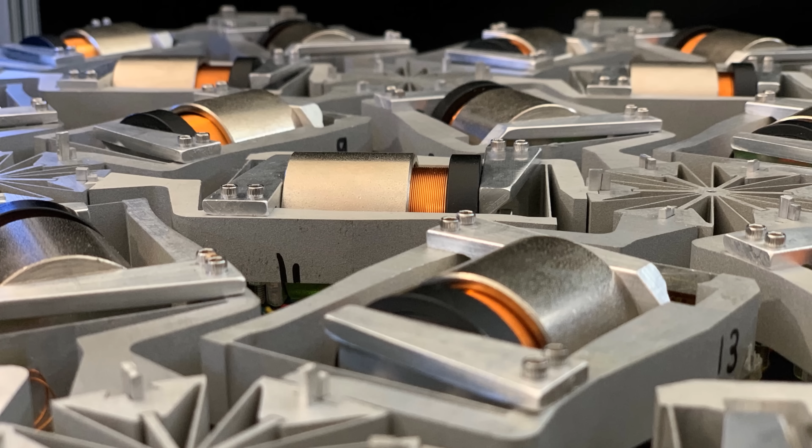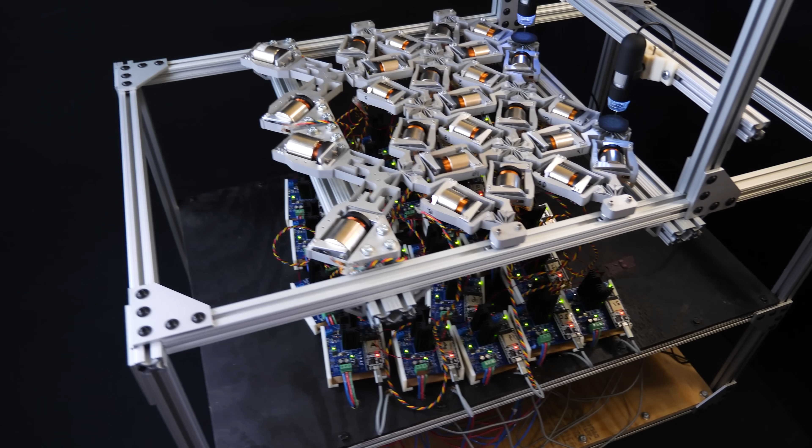This is a compliant machine called a mechanical neural network. It's the first of its kind to successfully demonstrate the mysterious ability to learn, similar to biological brains. Inspired by the mathematics of artificial neural networks, which enable most artificial intelligent machine learning technologies today, this mechanical neural network paves the way for a new kind of material that can physically learn its mechanical behaviors and properties.

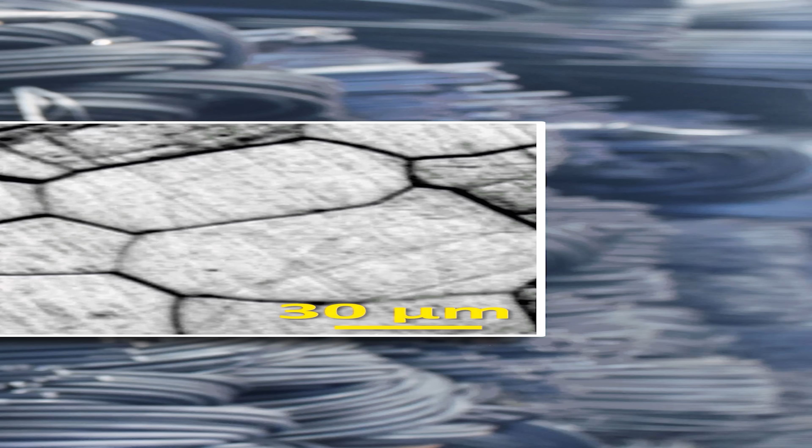Whereas the properties of most materials remain largely fixed and are a function of their composition and microstructure, this new kind of learning material could get better and better at exhibiting desired mechanical properties and behaviors, such as this shape morphing behavior, when exposed to ever-increasing amounts of loading experiences.

And if such materials are ever damaged or cut to form new shapes or sizes, they could not only relearn their original behaviors, but they could also learn new behaviors as desired. The applications of such learning materials are endless.

Imagine training the wings of an aircraft so that they learn to optimally warp their airfoil shape when subjected to unanticipated and changing wind loading conditions, so that the aircraft improves its fuel efficiency and maneuverability with every flight.

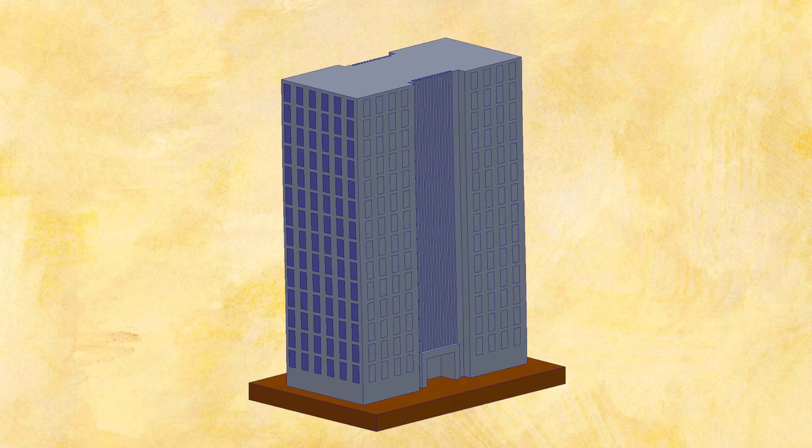Or imagine training the structural members of a building by shaking them in different ways so that the building learns to remain stationary regardless of the kind of seismic waves induced by an actual earthquake when it strikes.

Or imagine training body armor by repeatedly shooting it at different locations and from different orientations so that the armor gets better and better at redirecting any projectiles' impacting shock waves away from vital organs.

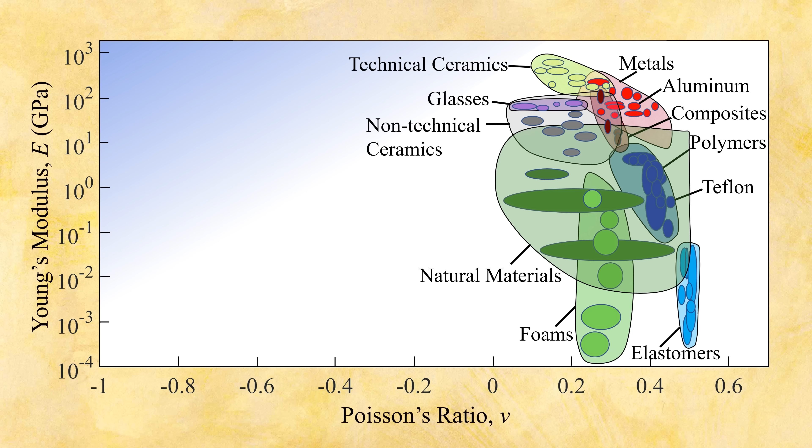Instead of expending the immense amount of time and cost it currently takes to develop a new material that achieves specific combinations of desired properties which are currently not possible, such learning materials could simply be deployed without human understanding, and the material would autonomously learn to achieve those properties while also acquiring that understanding for future designers to learn from. So how would this kind of learning material work?

Well, it's important to first understand the source of its inspiration. The idea for a mechanical neural network was inspired by a physical version of an artificial neural network.

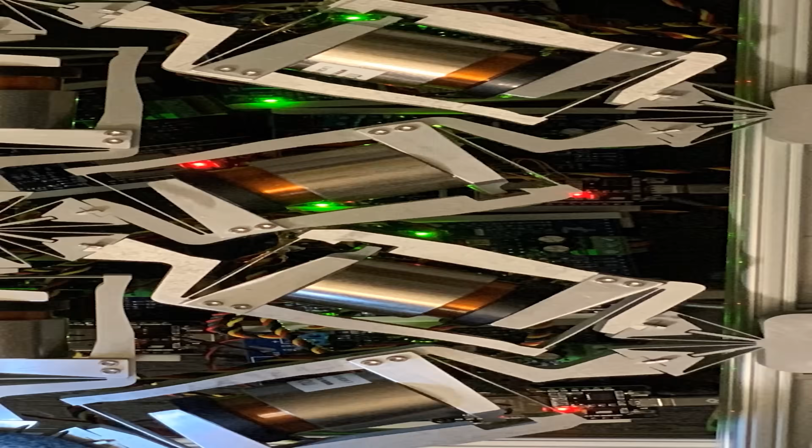The mathematics underlying artificial neural networks are diagrammed using interconnected lines that represent scalar weight values, which are multiplied by input numbers that are fed into multiple layers of neurons. These neurons consist of activation functions that ultimately produce output numbers.

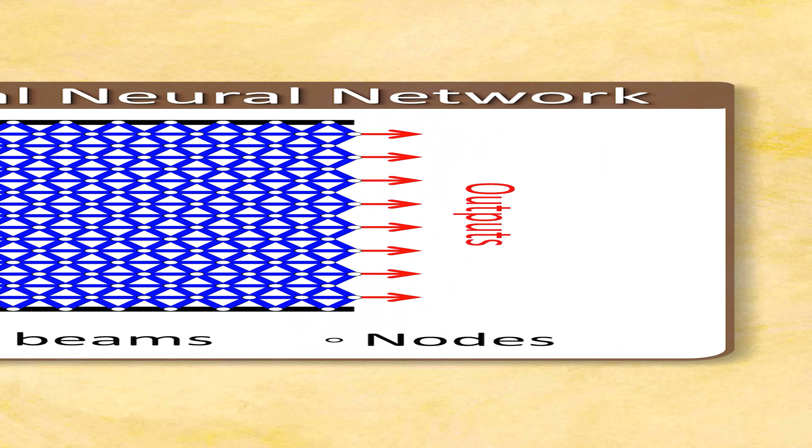To demonstrate how the envisioned mechanical learning would work, suppose a shape morphing behavior is desired for the following 8-layer deep triangular lattice consisting of 8 input nodes and 8 output nodes. Note that the black bars along the top and bottom edges of this lattice represent a grounded body on which the nodes that touch it are pinned.

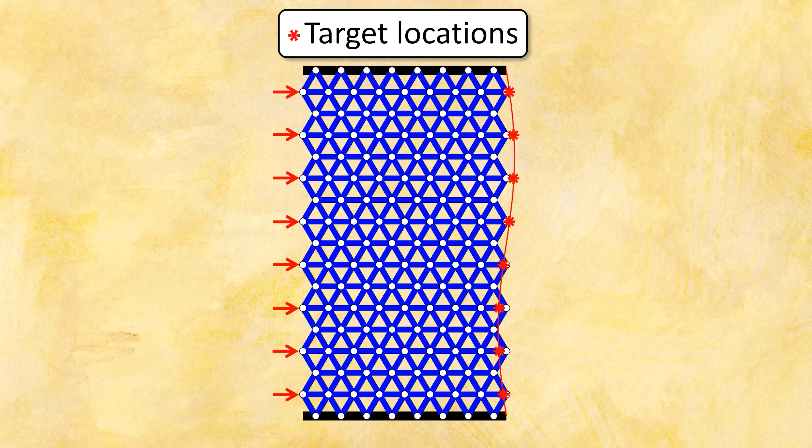Suppose that when the input nodes along the left side are loaded by equivalent horizontal forces, it is desired that the output nodes along the right side respond by displacing to target locations along the contour of an undulating sinusoidal shape shown as the red curve.

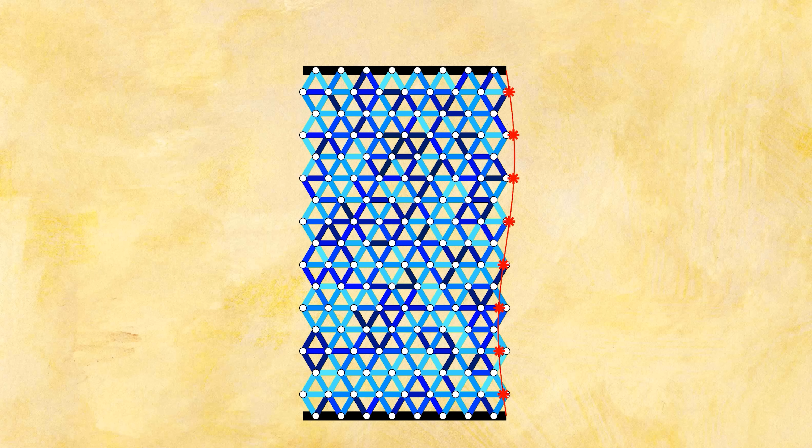To learn this shape morphing behavior, each tunable beam in the lattice would start the learning process by setting their axial stiffness to a random value, depicted here as a specific shade of blue, according to this color scale.

When the input nodes on the left side of the lattice are loaded with the horizontal input forces of the desired behavior, the resulting displacements of the output nodes would then be measured, and a mean squared error, i.e.

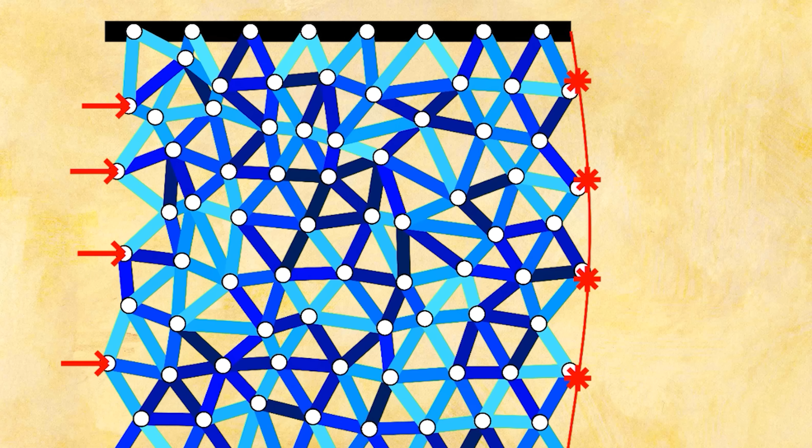MSE would be calculated by finding the average of the scalar difference between the target output node displacements and these measured output node displacements, i.e. their final location error, E_i, for all n nodes on the right side of the lattice, squared. For this lattice, n equals 8 output nodes.

The tunable beam elements would then change their axial stiffness values according to an optimization algorithm, such that when the process of loading, measuring, and calculating the mean squared error is repeated, the mean squared error would be minimized.

Until a working combination of beam stiffness values is identified that achieves the desired behavior. One possible combination of beam stiffness values that enabled this mechanical neural network to achieve the desired sinusoidal shape morphing behavior is shown here. Suppose it is desired that the neural network then learns another new behavior in addition to the first: that in addition to the lattice's output nodes displacing to this sinusoidal shape in response to its input nodes being loaded with equivalent horizontal forces, the same lattice's output nodes also displace to an inverted sinusoidal shape in response to its input nodes being loaded by equivalent vertical input forces instead.

To learn the new behavior, shown green, while maintaining the ability to simultaneously achieve the first behavior, shown red, the lattice of tunable beam elements could either start with another random combination of stiffness values, as shown here, or they could start with the same combination of stiffness values that were found to successfully achieve the first behavior only. Parenthetically, the latter choice becomes increasingly favorable as the mechanical neural network acquires more and more behaviors, because the working combination of beam stiffness values acts as a sort of muscle memory for previously learned behaviors.

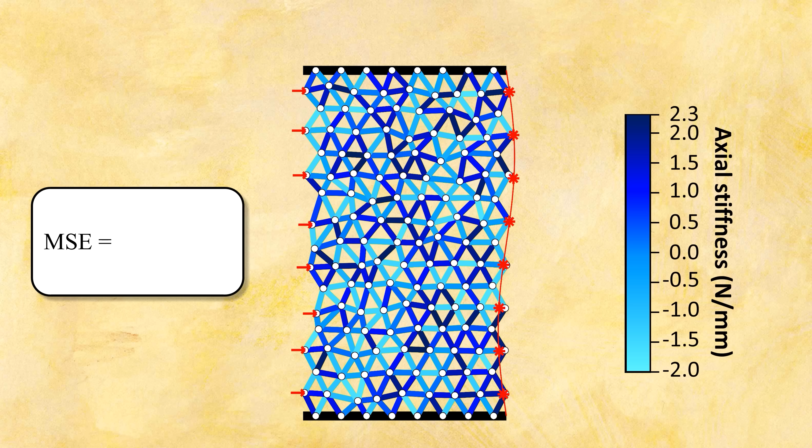The tunable beam elements would then change their axial stiffness values according to the same optimization algorithm, such that when the process of loading, measuring, and calculating the cumulative mean squared error of both behaviors is repeated, this new mean squared error would be minimized until a working combination of beam stiffness values is identified that successfully achieves the first and second behaviors simultaneously.

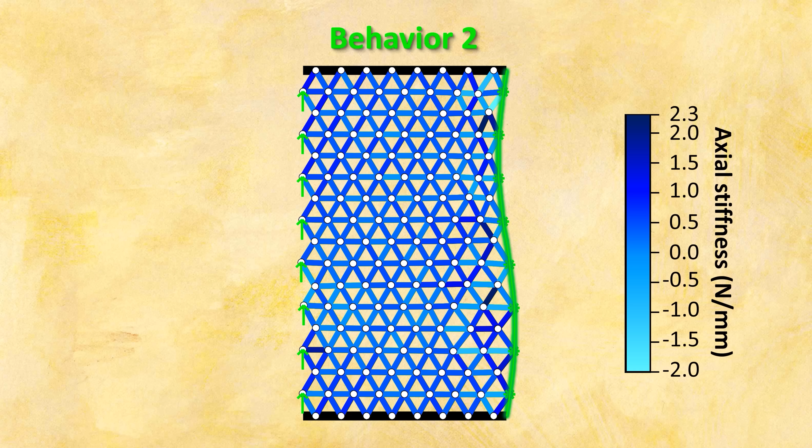Note that the tunable beams all remain the same shade of blue regardless of whether the lattice is actuated with the loads of the first or the second behaviors, because the same combination of beam stiffness values successfully achieves both behaviors. It's also important to recognize that mechanical neural networks can achieve the same desired set of behaviors using many different combinations of beam stiffness values.

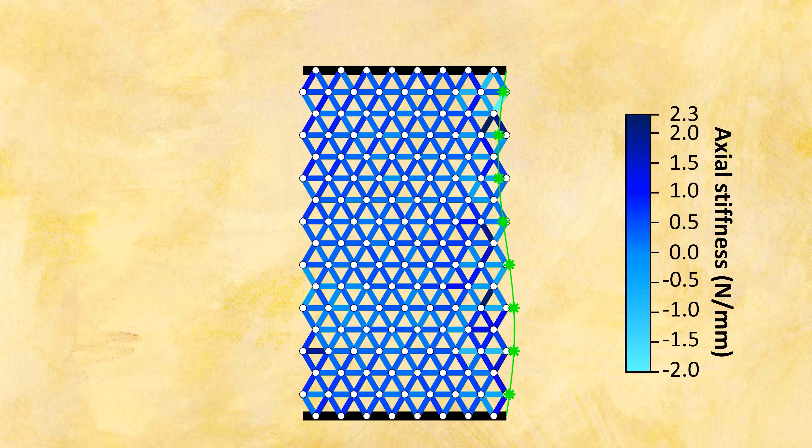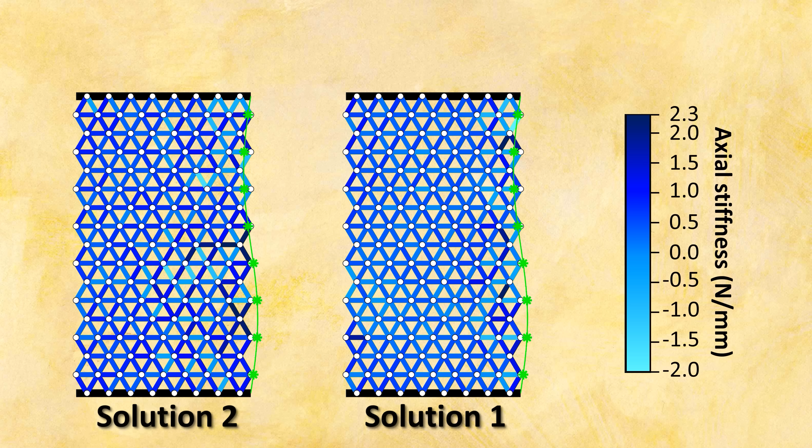Note, for instance, that although this second solution exhibits the same desired behaviors as our first solution, it does so with an entirely different combination of beam stiffness values. The fact that many different combinations of beam stiffness values can achieve the same behaviors allows mechanical neural networks to learn more and more new behaviors while retaining memory of previously learned behaviors.

Finally, it's also worth noting that mechanical neural networks are not limited to learning shape-morphing behaviors only, but can learn almost any combination of quasi-static, thermal, and even dynamic mechanical behaviors, including the control of wave propagation within their lattice.

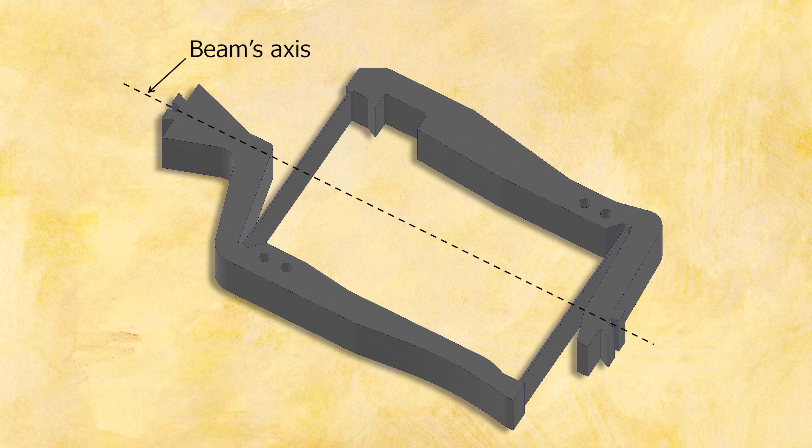To experimentally demonstrate the concept of a mechanical neural network, it was important to first design a tunable beam that could achieve adjustable stiffness along its axis. After comparing multiple concepts, we settled on this compliant design. It consists of two parallel blade flexures that deform to guide the translational extension and contraction of the beam along its axis, while rigidly constraining all other directions.

A bracket is attached to the beam's housing, in part to provide a hard stop so that the parallel blade flexures are not allowed to deform to a point where they would yield, i.e. be permanently damaged beyond their elastic limit.

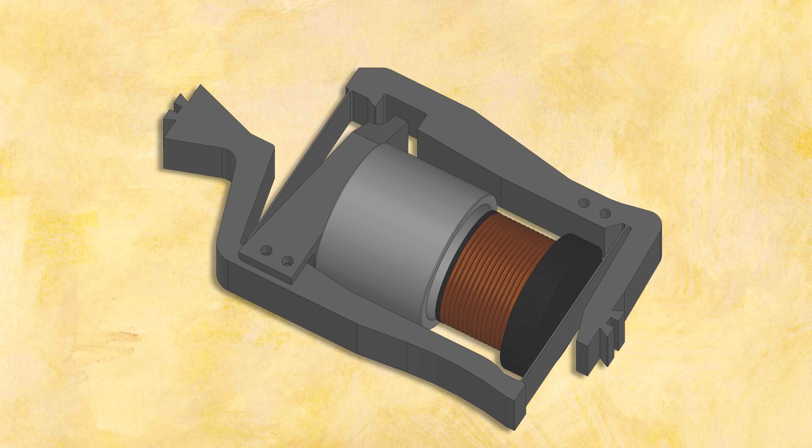The bracket is also attached to the magnet end of a voice coil actuator, which is aligned with the beam's central axis. The actuator's other mating end, which consists of a coil of copper wire wrapped around a drum, is attached to another bracket that is attached to the other side of the beam's housing.

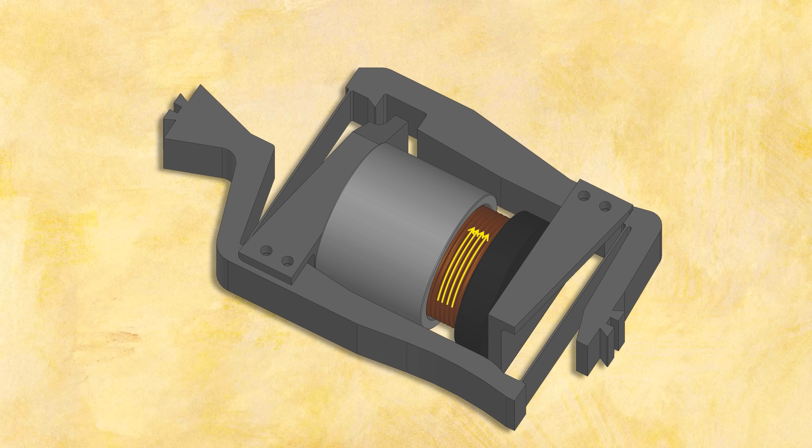Depending on the direction and magnitude of the current flowing through the wrapped wire, a magnetic field can be induced by the coil that pushes or pulls on the voice coil's magnet end, thus actuating the beam along its axis in either direction. Two strain gauge sensors are mounted on either side of one of the parallel blade flexures at its base to accurately measure the resulting displacement of the beam along its axis by transforming the flexure's deformation strain into a proportional voltage signal.

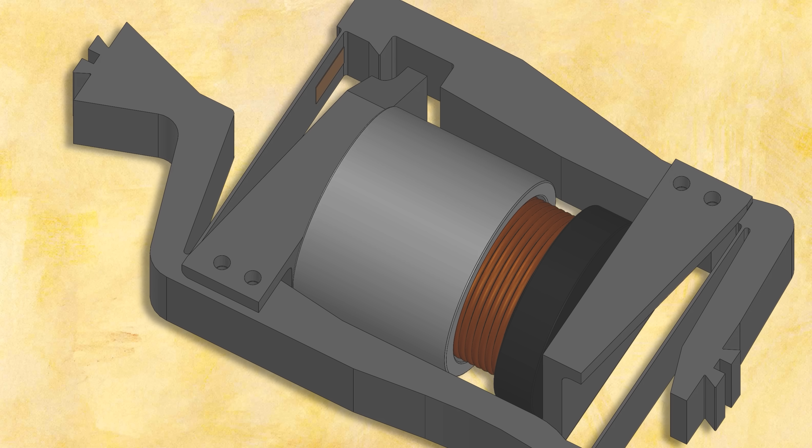In this way, closed-loop control can be applied to actively tune the beam's axial stiffness to achieve any value between an upper and a lower limit.

You could imagine that the highest axial stiffness would be achieved if, when the beam is loaded, the voice coil responds by resisting the load with the largest actuated force possible in the opposite direction as the applied load. Likewise, the lowest axial stiffness would be achieved if, when the beam is loaded, the voice coil responds by assisting the load with the largest actuated force possible along the same direction as the applied load.

In this way, the tunable beams could be made to achieve zero or even negative stiffness.

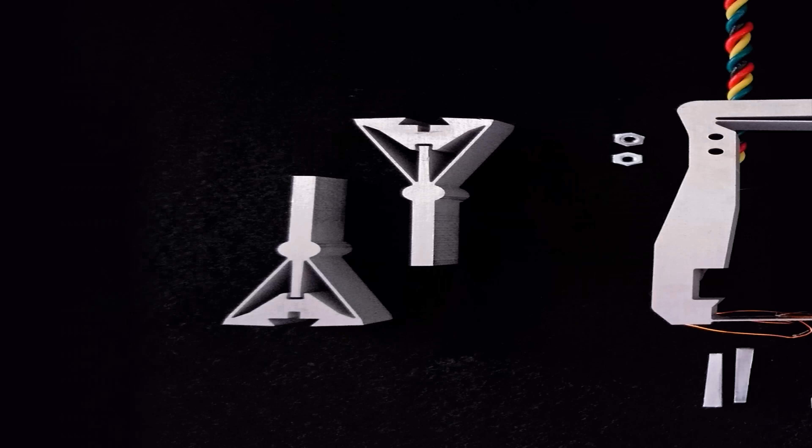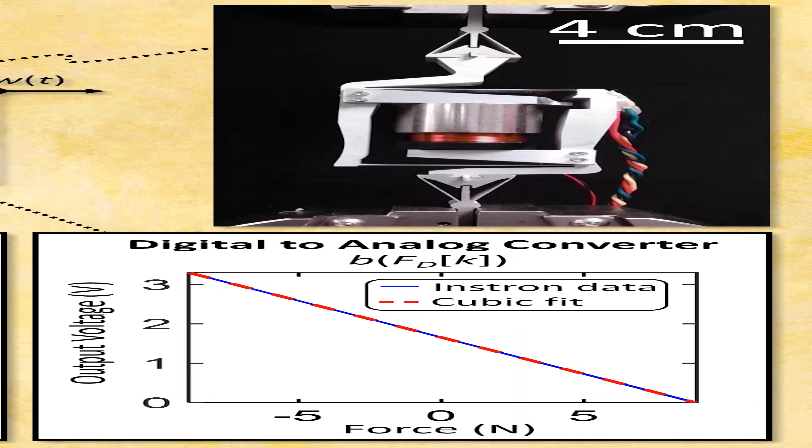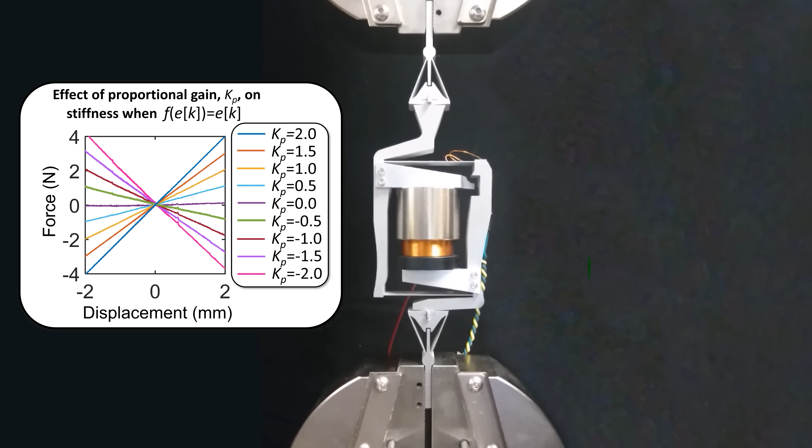This plot, measured using an Instron testing machine, shows the linear force displacement responses of a tunable beam being controlled with different Kp values to achieve corresponding positive and negative axial stiffness values. The maximum and minimum stiffness values that the beam could be controlled to achieve without becoming unstable was measured to be 2.3 newtons per millimeter and -2 newtons per millimeter respectively.

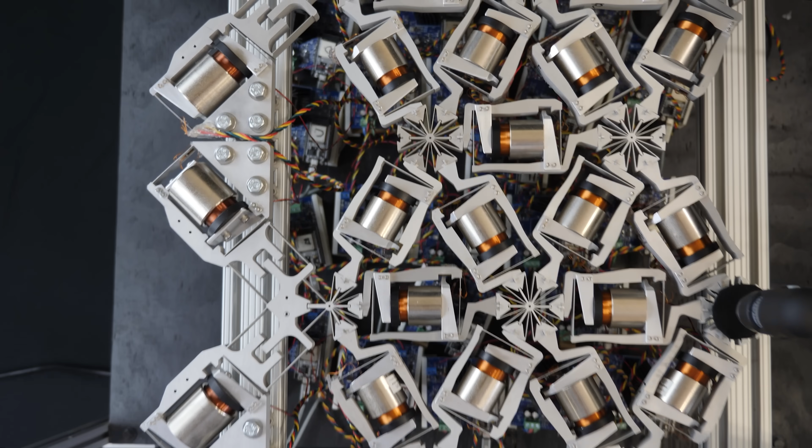Four additional voice coil actuators were used in conjunction with decoupling flexures to drive the two input nodes on the left side of the lattice with forces that can be made to point in any in-plane direction desired. Two cameras mounted on a frame directly measure the displacement of pins inserted at the center of both output nodes, and black felt is used to contrast the white color of the pin heads so that they stand out.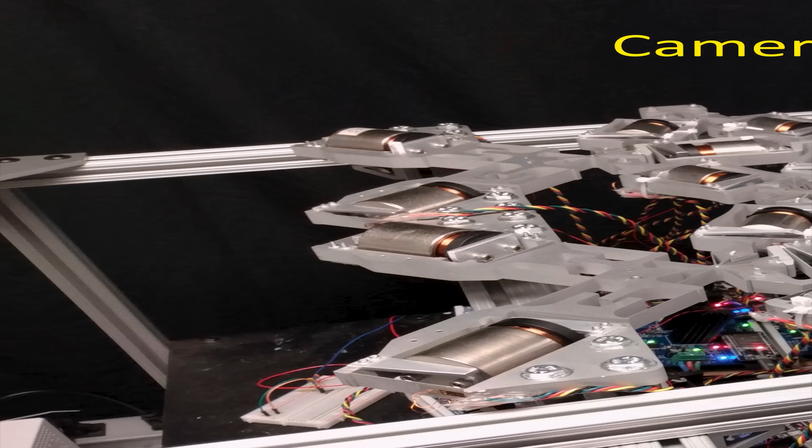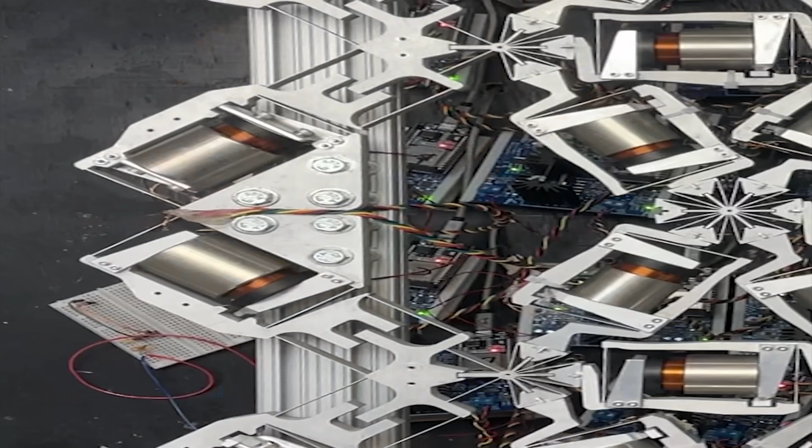Although the machine's two mounted cameras can directly measure the lattice's output node displacements, note that the strain gauge sensors on each beam can directly measure the beam's extension and contraction, and that information can be used to indirectly calculate the displacements of all the nodes in the mechanical neural network, including the displacements of its output nodes. This strain gauge approach to indirectly sensing the output node displacements can predict the displacements with a much higher sampling rate compared to the frame rate of the cameras.

These plots show how accurately the strain gauge approach tracked the camera's measured output node displacements when the lattice was loaded with a random combination of axial stiffness values uploaded to each tunable beam in the lattice. The strain gauge approach is also important to the functionality of mechanical neural networks because without the approach, such networks cannot learn without being placed in a testing rig, which is not practical for most applications that require in-field learning.

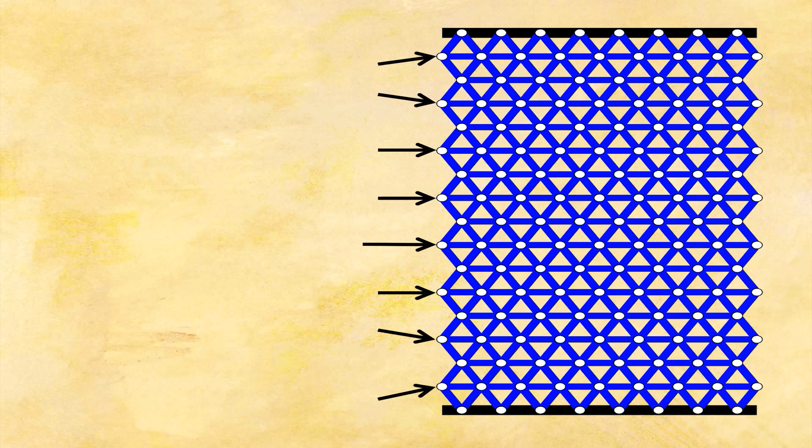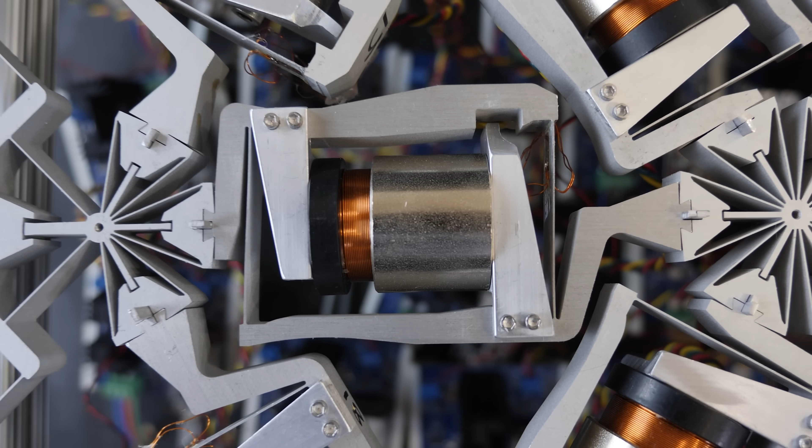Moreover, the ability to accurately measure the displacements of all the nodes in the network when it is subjected to unanticipated and changing ambient loading scenarios is necessary for mechanical neural networks to identify when those loads correspond to the input forces of their desired behaviors being learned, so the network can calculate its mean squared error and minimize it as described previously. Note that the input node forces can be indirectly calculated at any given time using the current combination of beam stiffness values uploaded to the network and the corresponding strain gauge measured displacements of all the network's nodes that resulted from these loading forces.

The first optimization algorithm we used to determine what combination of axial stiffness values should be uploaded to each tunable beam in the lattice during each step of the learning approach was a genetic algorithm.

The algorithm samples 1,000 random beam stiffness combinations. It then identifies and plots the combination that achieved the lowest resulting output node displacement mean squared error. A new, more promising group of 1,000 beam stiffness combinations is then generated by crossing the most successful combinations attempted in the previous group. This process is repeated until the mean squared error stops changing from one group to the next.

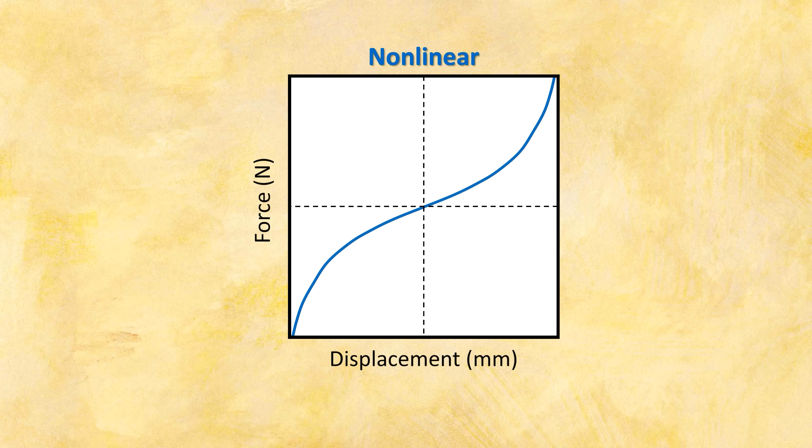We were also interested in using the mechanical neural network to determine whether beams tuned to exhibit nonlinear stiffness, i.e. stiffness that changes as the beams deform, are favorable for learning compared to beams tuned to exhibit linear stiffness. Our closed-loop controller was designed to test this hypothesis.

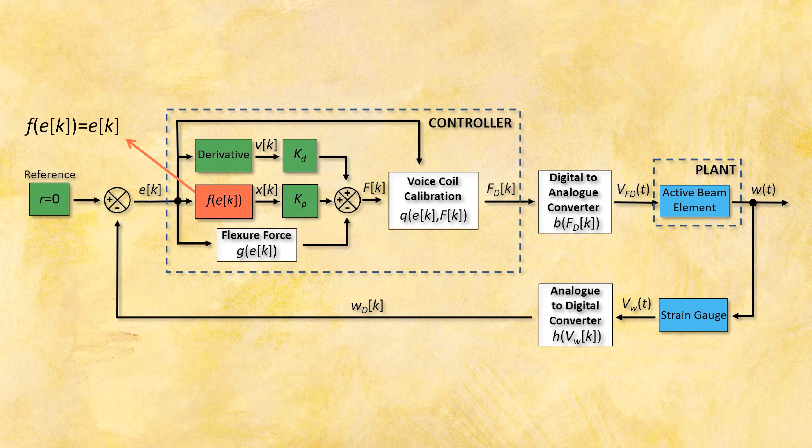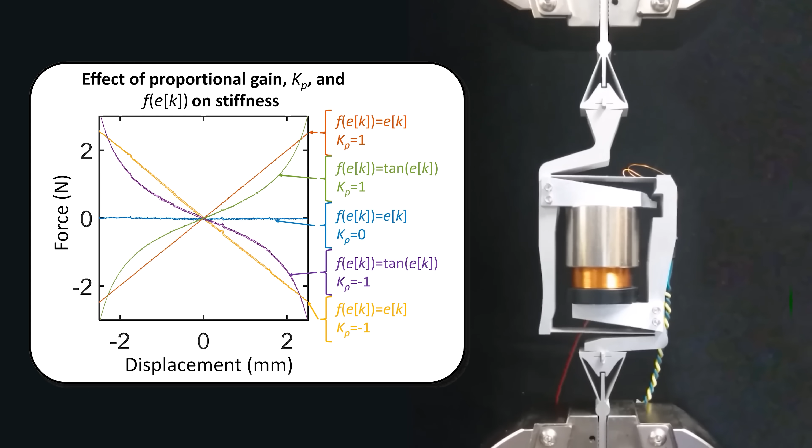If this f of ek function is changed from ek to a different function, like tangent ek, then the resulting force displacement plot exhibited by the actively controlled beam would be a nonlinear tangent function. This plot shows the tunable beam's force displacement response measured using an Instron testing machine with f of ek equaling ek and tangent ek for different proportional gain values, i.e. a kp of 1, 0, and -1.

Lower mean squared error than tunable beams that achieve nonlinear stiffness.

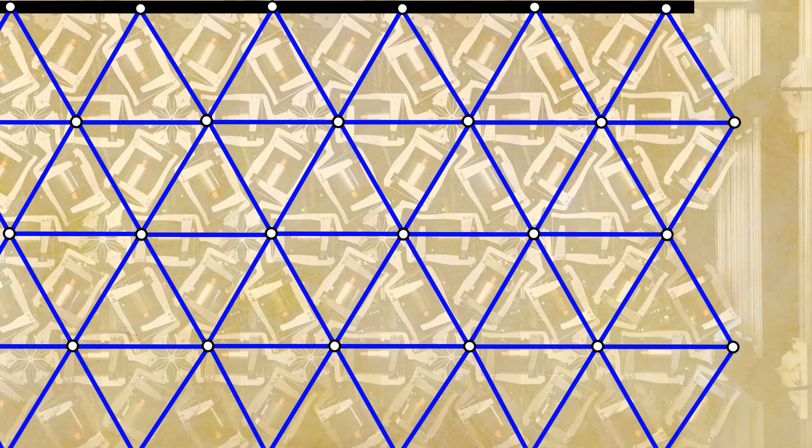We then created a computational tool to simulate the behavior of our mechanical neural network design so that we could use the tool to predict how well larger versions of the same design would learn if we had the time and resources to build and incorporate many more tunable beams within its lattice, as depicted by this photoshopped image of a much larger lattice. Our computational tool models the tunable beams as linear beams, depicted as blue lines, and their lengths are set to be the length of the beams in our fabricated mechanical neural network, i.e., 6 inches from node to node.

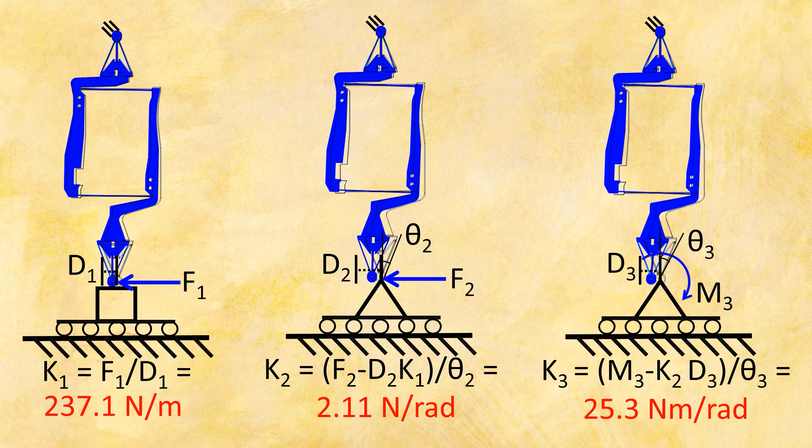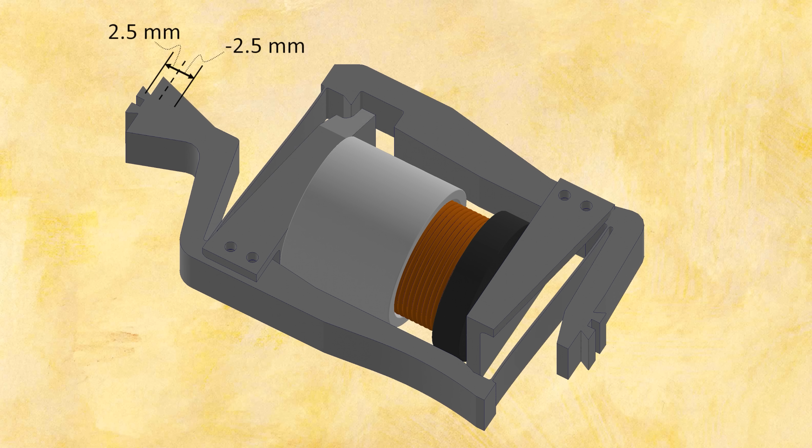We restricted each beam in our simulation to only achieve axial stiffness values between the maximum and minimum stiffness values measured from our fabricated beam, i.e., 2.3 newtons per millimeter and -2 newtons per millimeter respectively, and we set their passive non-axial stiffness values equal to the values calculated using finite element analysis as shown here. We also restricted the simulated beams from extending or contracting more than ±2.5 millimeters, which is the limit of our fabricated beams as governed by their hard stops.

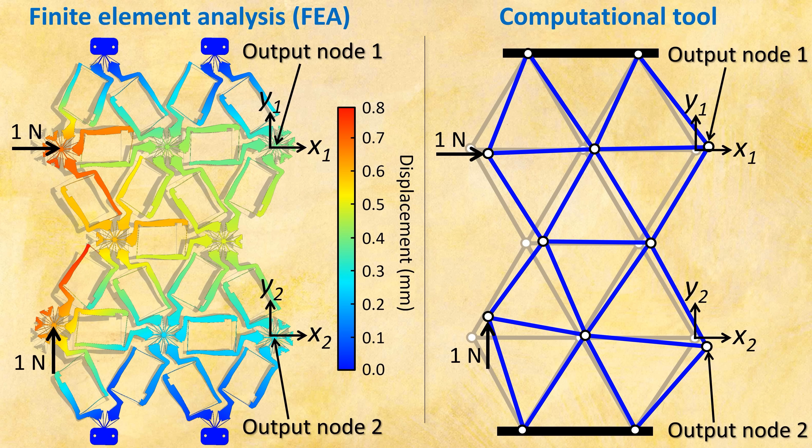Once configured to mimic our fabricated mechanical neural network, the computational tool was then used to simulate the effect that the number of layers would have on the ability for a triangularly configured mechanical neural network consisting of 8 input and output nodes to learn different numbers of random shape morphing behaviors.

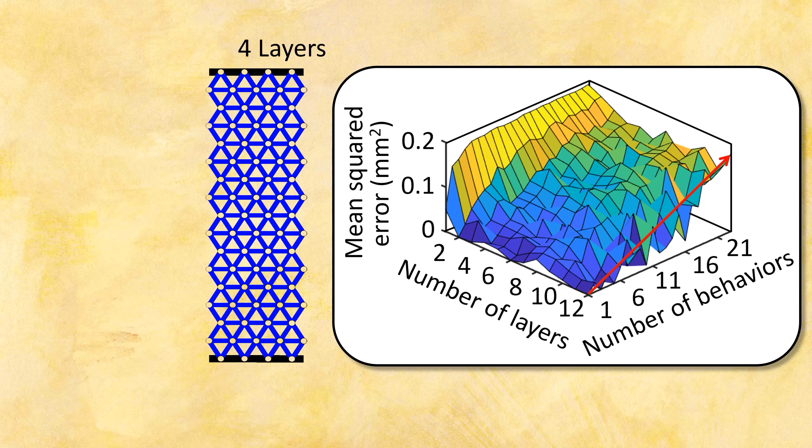The results of the study indicate: one, that mechanical learning improves with more layers, likely because there are more tunable beams with which to learn; and two, the more random behaviors that are required to be learned, the less accurately all the behaviors can be learned simultaneously.

The reason is likely because triangular lattices have more beams for the same number of layers, and they can propagate displacements in all directions rather than just along orthogonal directions, as is the case with square lattices.

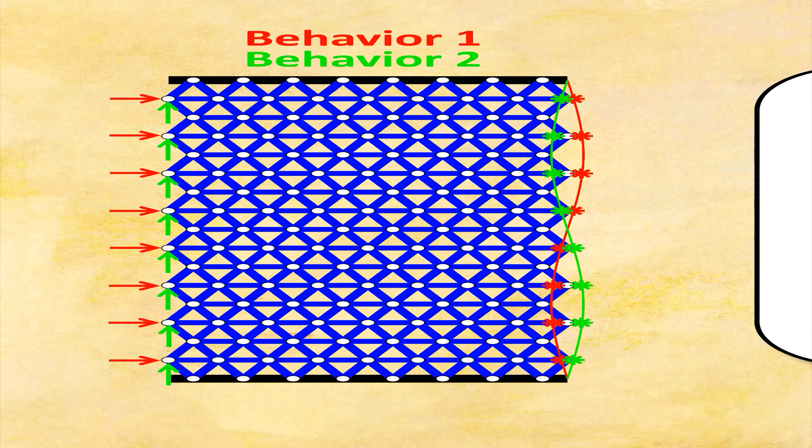To learn the effect that the number of layers and output nodes have on mechanical learning, we used our computational tool to generate the following plot for triangular lattices that learn the 2 sinusoidal behaviors described previously.